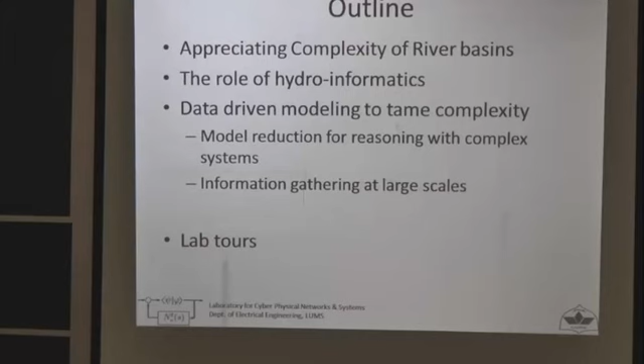Okay, now let me quickly give you an overview of my group. This is not WIT—this group existed before the Water Informatics and Technology Center came into being. I call it the Laboratory for Cyber-Physical Networks and Systems, a strange name for a water crowd. I joined LUMS in 2008, and since then we've been working a lot in agricultural automation and robotics. I'm essentially a roboticist by training, a control engineer, and in the last 7-8 years we've been looking at a lot of water systems and hydroinformatics related issues.

I just wanted to mention a few collaborations, not to boast about what we have accomplished so far, but really to give you a feel for what sort of research we are engaged in.

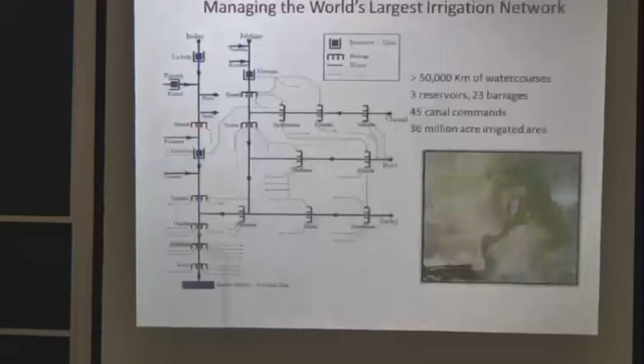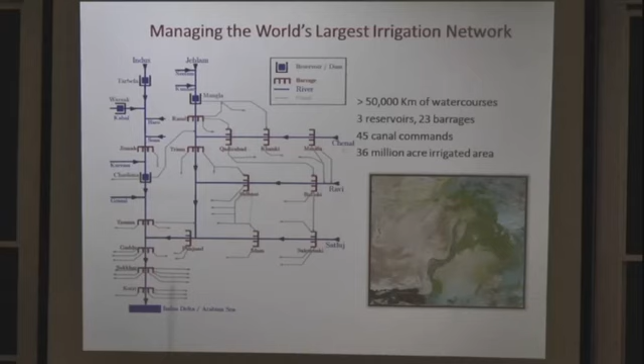Now again, let's appreciate this complexity from the point of view of scale. What we're trying to say is that the complexity of this basin comes as a problem of scale. The technical and institutional challenges are really problems of what sort of scales we're talking about. First, these are spatial scales - it's a very, very large net basin. We were talking about climate stations or rain stations in the morning, and the inability to place these stations at so many places. I just showed you the world's largest contiguous irrigation network, and you want to monitor that - measure flows in thousands of channels or outlets. So it's really the spatial scale, the inability to monitor and maintain geographically extended infrastructure. If you go by the traditional way of doing it, this is where it hurts us.

Then there's this problem of time scales. We want to collect information, we want to know what's going on in this system. The system is very complex, but it's really a multi-scale system. There's a lot going on, and you want to collect information and react within short time spans as well. But the complexity of the system isn't allowing you to do that, and I'll give you a few examples of that.

Also keep in mind there's the inability to scale the expertise - the human scalability. The basin is our country, 200 million people. You're looking at all sorts of problems, and if you have one federal body or one expert looking at one particular problem, how do you scale that expertise to all the variations of that problem? So the inability to scale spatially, temporally, as well as the human scale poses a big problem. You want to look at the entire basin, and then what do you do?

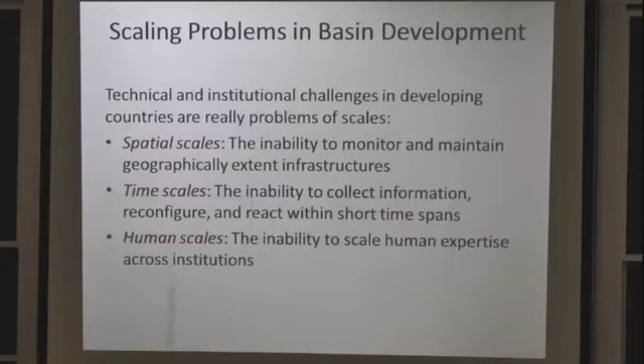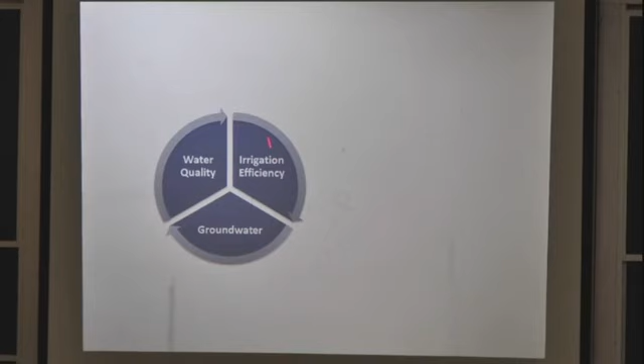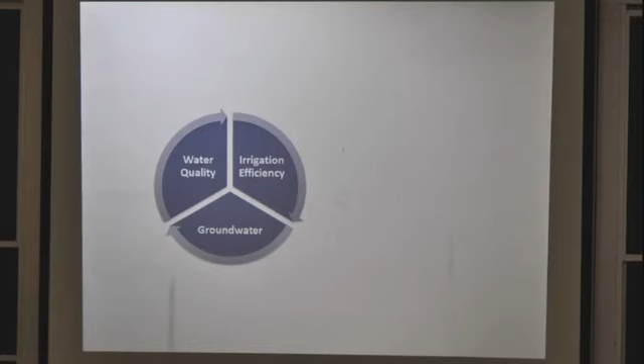I think this is where this whole idea of informatics comes in. Let me give a picture to make the case for where hydroinformatics tools help you. We start with our list of favorite problems, whatever they are - these may not be the biggest problems in your mind related to water, but that's beside the point. Take any problem, and what we've been looking at in the past day or two is how do we actually formulate these problems?

So good science, coming from hydrology, from these data sets, looking at the geophysics, the geochemistry, and really to formulate the problem first. We have not talked about legal frameworks yet. The legal and economic frameworks actually fall into the same sort of category. So first of all, we understand the problem.

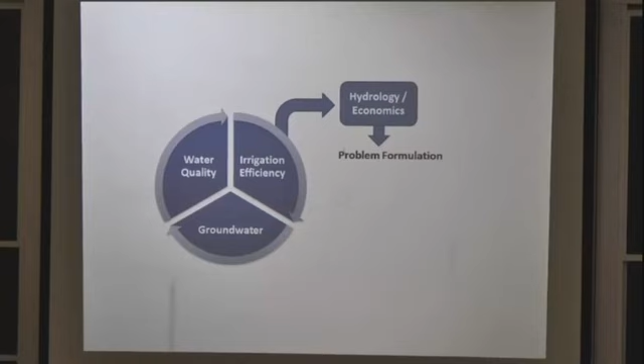In addition to that, what hydroinformatics provides you is a lot of gadgets, or you can say a lot of methodologies to look at those problems and really generate data. Problem formulation means that the step upstairs is sort of a rational process in which you are just imagining what is possible and how things should be. And then this is where you are looking at how things are on the ground.

And then the third step, which Dr. Afreen actually started to do in the morning, is where you actually bring both of them together in some sort of an integrated system analysis. So if you want to do some sort of system analysis or situation analysis of law, as you just saw there, what do you need? Well, first of all, you need to formulate the problem right. It has to be driven by good science, by good economics, and so on and so forth.

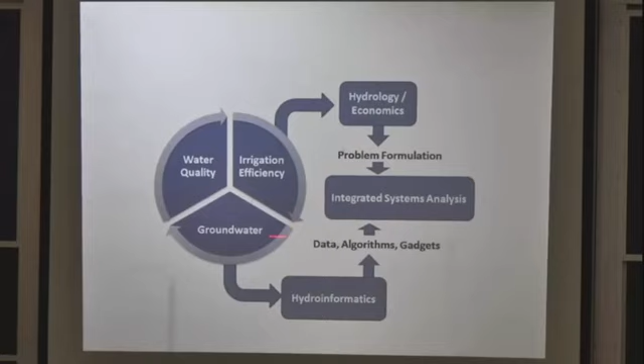And then maybe to facilitate that process, you also need good data. And that critical step can be helped by these hydroinformatics tools. And then once you do this integrated system analysis, then of course you can talk about the sort of technology interventions, and the sort of other steps or policy advice that need to be taken. So this is the general picture.

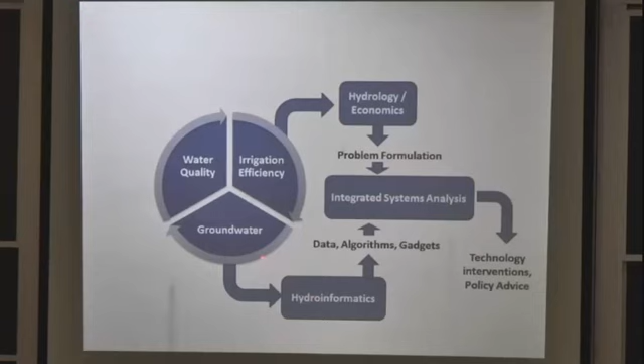In some ways, it captures the essence of the school as well. These are the different aspects of the school that map to these components. This is not, by the way, very controversial, and I think most of us agree on this. But here I'm picking this step as a very special step, because our basin is very, very different from other basins because of the scales of analysis. Now, if I bring in these hydroinformatic tools...

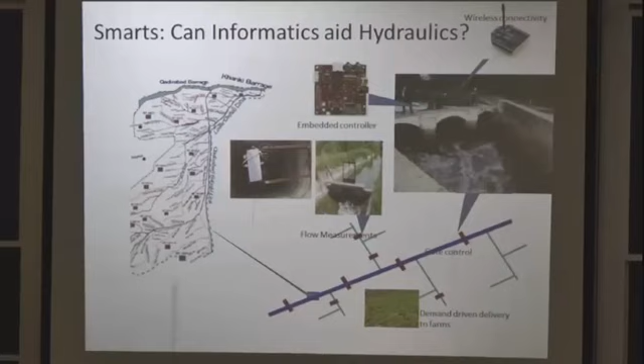What I say is that we are basically attaching smarts to the hydraulics in one sense. So you had this classical picture in which you were laying out these infrastructures - canals, wells, pumps, and so on and so forth. And now what we are doing is we are bringing in a lot of electronics, a lot of measurements, a lot of interventions. And then the question you can ask is, well, if these informatics are there, can they now aid the hydraulics? This is what I'll try to make a case about - that yes, a lot can be done by marrying the two.

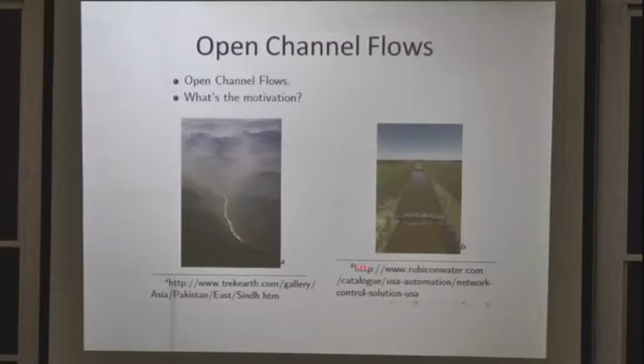Okay, so first of all, this idea of taming complexity with simple models. Now, let me come first to open channel flow as one example. This is traditional classical civil engineering, where you want to just see, or model, how water flows in channels - open channels, like rivers, like canals, like streams.

And the traditional way of going about it is - and you can also think about some man-made infrastructures put into that stream, so you can, for example, think about gates, which are controlling the inflow and the outflow from those streams. And we call them pools or reaches, just to get our terminology right.

And I put on some variables in there because later we'll be playing with those variables. So let me just spell them out. For each of these reaches or pools, there is an in-gate and then there is an out-gate - so there is an upstream gate and a downstream gate. This, by the way, would actually be inclined - it's not going to be flat, because that is how water flows. But these steps are meant to show that this is actually inclined. And then the height of the gate - now the gates can be of different structures, but just as a cartoon, the height of the gate actually controls the opening, or the head.

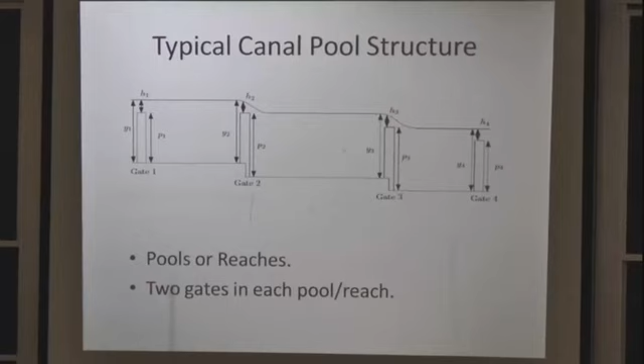And the head is given the symbol H. And depending on what this head is, then water will flow in. And depending on what head here is, water will flow out. And now you want to find out, well, what's going on within this pool, because this is a very classical 101, I would say, in traditional civil engineering. And where they start mainly is they would come up with these very complicated distributed models, these Navier-Stokes equations, essentially done in 1D, and then they call them the Saint-Venant equations.

This is the basic structure: you go along the length of the canal or pool, chop it up into little pieces, and each piece is modeled as a little element in which you model the flow and the area as basic variables. So Q depends on where you are, X, and time, T. And depending on the water level, there will be an area of cross section, so the area is also a function of X and T.

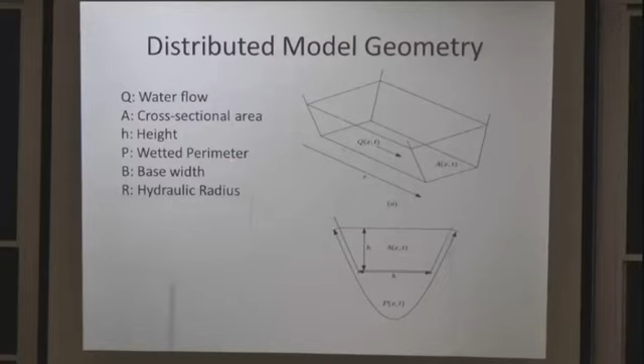I will not go into a lot of physics and maths, but just lay the grounds for what's coming next. There are other things associated that I won't bother with, but this is usually how you start.

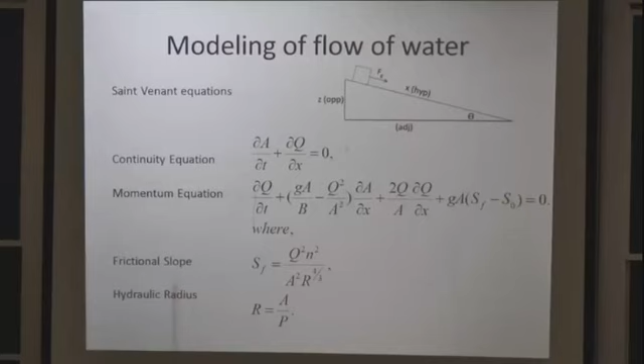You basically pass these little cubes together, and this becomes a big partial differential equation, meaning it's a distributed model. You can go along the length of the canal or river to find out exactly where the flow is and what the area of cross section is. If you solve this system of partial differential equations — I won't try to explain what they are, just portray that these are very complex models — this is a distributed, nonlinear model, so it cannot be solved analytically. If you want to know everything about what's going on in the canal, you actually need to solve this equation.

I won't go into a lot of interpretation of this, but just to let you appreciate that if you want to know what's going on in a particular channel, this is what you need to do — essentially solve or somehow find the flow at every distance and every time, and that's quite a big task for somebody to do.

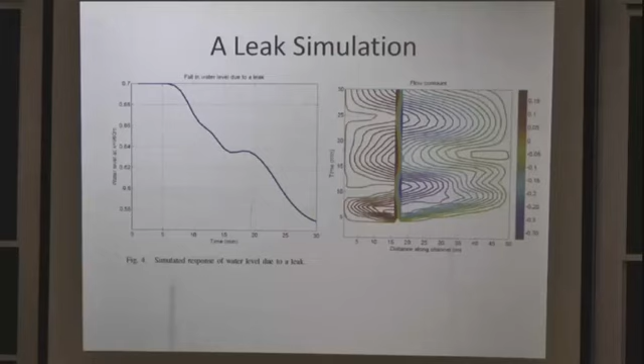Now, like I said in the beginning, if you have hundreds or thousands of channels to look at, you'd be solving this for all of those channels and then trying to reason with them together — this pool does this, it's adjacent to another pool, and so on, together making a canal, and dozens of canals making up a particular canal command. Now you want to reason with the whole system. That's not the way to go, because just the numerical thinking overloads you.

Now what we are proposing is that you can actually start with very simple models. I think in the morning Dr. Asif mentioned these lumped models. These are not going to be very accurate models, we understand, but what they allow us to do is reason with these systems — to capture the complexity at a high level, somewhat, not exactly, but enough to let us think about these networks.

And then these civil engineers tell us, well, there is an empirical relationship. We saw this in the morning too, that there are empirical models that capture certain relationships. So the empirical model that captures the relationship between the height of the gate and the flow at this interface is given by this formula.

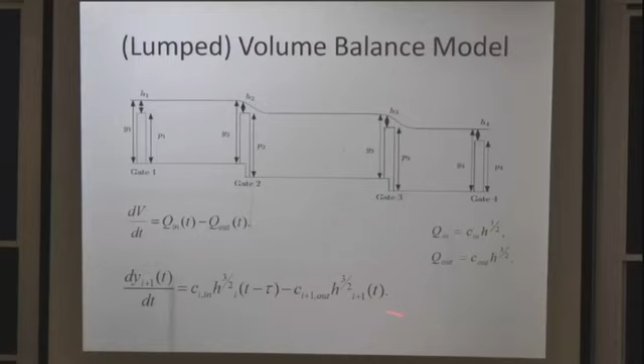And I will come back to this, in fact that is going to be our next task. For the Saint Venant equation, you knew how to do that because if you get the cross section for the canal, meaning the canal geometry, you can begin to do numerical simulation. But then how do you get these things? That is the critical next step. Well, again, these hydroinformatics type technologies are going to help us.

So what we are going to do is start with these physical models. And again, I thank Dr. Asif for introducing this terminology in the morning, that you have these physical sort of models. And now we are going to do these data-driven models.

Because I have to correct that, this is not a physical model, a physics-based model. A physical model is something physical, you are looking at something like that. But this is a mathematical model, a physics-based model.

Okay, so I think I stand corrected by the civil engineering crowd. You are talking about those scale models in Nandipur, huh? Yeah, okay, I stand corrected. So physics-based model—we electrical engineers call this a physical model.

So I think for us this is fine. But thank you for correcting that. In future I will use a physics-based model. Very picky. Absolutely.

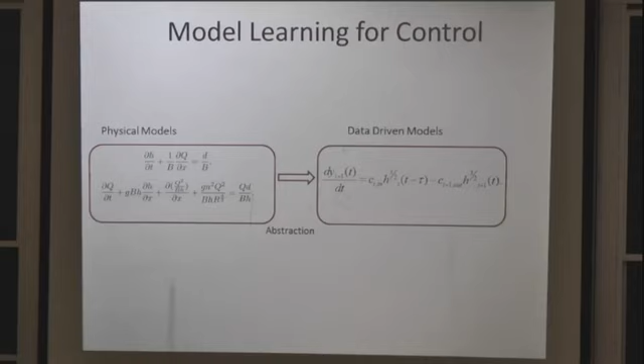So from a physics-based model, we are now going into a data-driven model. This is really the abstraction. But is it even possible? Can you really do that? This is where we did a little bit of work.

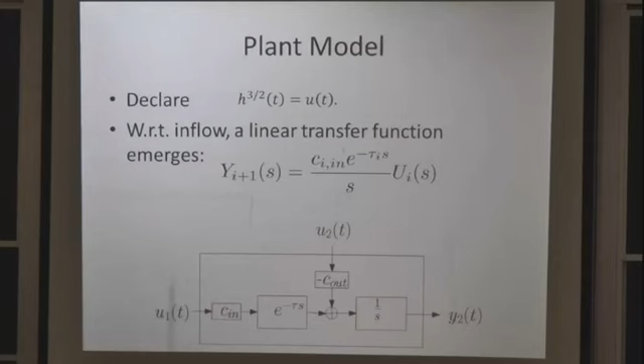And really what you are looking at is that there is a gate at the upstream and then the gate at the downstream, and this is your plant. So it's a very, very easily understandable model for the electrical engineers. Sorry about that. All right.

Now, how do you actually make use of these models? What are these good for? Even though it's a physics-based model, does it even make sense or not? What we do is give the system these same sort of inputs and find out what it is doing, and then give it to the model to find out what parameters will explain the working of the model that way. So it's a very empirical fitting.

So here what we are doing is in simulation, at one end we are changing the gates vigorously, closing and opening up and down. And on the downstream side also we are closing and opening the gates. And then we see what the water levels are like.

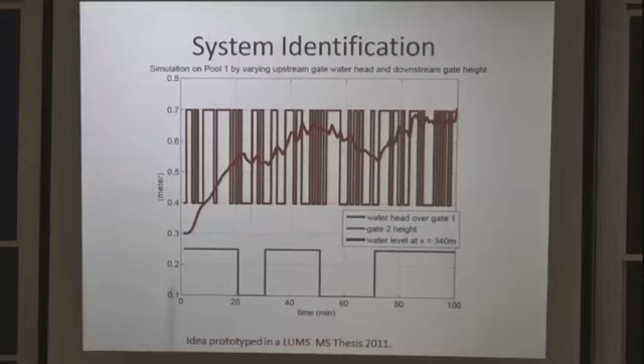I mean, just looking at them, they look similar. At least they look similar. I have to say that red fitting and blue line - red is predicted by the model, which is the mass balance equation, not a Saint Venant equation. The blue one is the Saint Venant equation. You are solving this equation. This is not a Saint Venant equation.

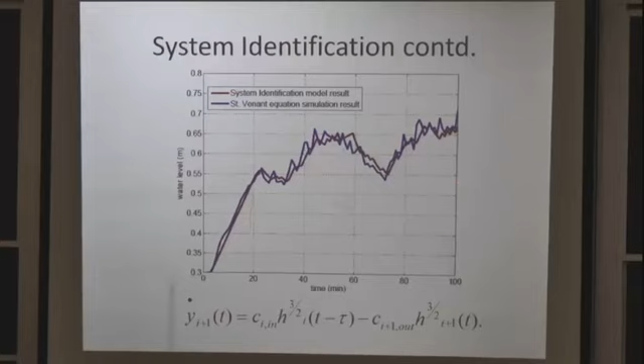What I'm saying is, wait - what I'm saying is that I have solved the Saint Venant equation. And then after solving the Saint Venant equation, I have taken just one cut at a particular distance, and that is the blue line. Now I take this model, and it is composed of these three parameters, and I search for the three values of C in, C out, and tau that somehow align with this, and that is actually the red one. And by the way, this is all in simulation so far, and then you can find out what the parameters are. We actually did this in actual conditions, just to see whether this works or not.

So these were some of the experiments that we did at - this is a channel known as Khaira Distributary. I don't know how many of you know about this. It's just right next to, so it emerges from Jallo, where the Lahore Canal emerges, and then it comes all the way here to Lahore. This is an old distributary which is no longer used for irrigation purposes. So we had permission from the irrigation department. This is really our test bed for the last few years where we have been doing these things.

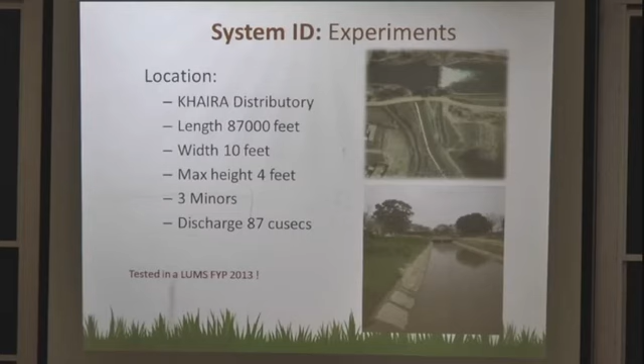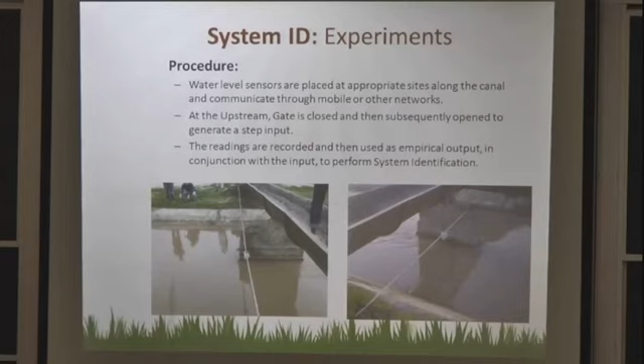What we did was that the procedure was that we actually placed these water level sensors at the point where we wanted to verify this sort of model. And then we just opened and closed the gates to find out whether our models were fitting or not. And let me actually play a little video.

I will skip the map.

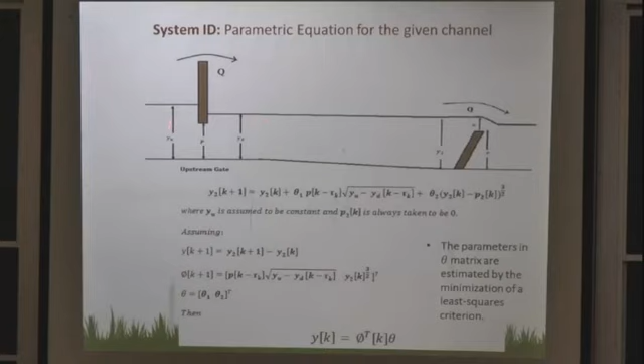This is just a little bit of detail about what you needed to do. This is a discretization of the model and playing with the gate structure.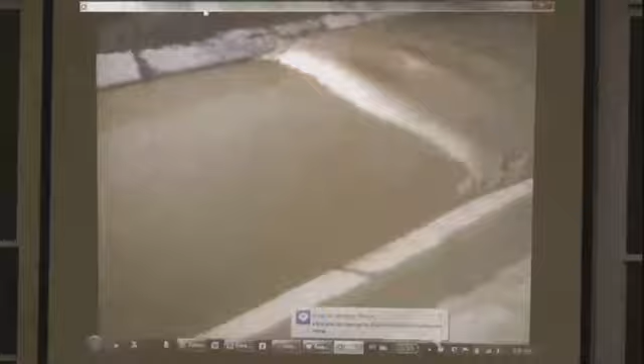Now I'll play a little video, maybe it won't excite the civil engineers, but at least it will excite the non-engineers. This is a release, and I think the irrigation people allowed us to do that. All of a sudden you pull the gate, and then water is gushing through. This is the travel I was talking about. This is an actual experiment, just to let you know we did an actual experiment. I think the irrigation people don't normally allow these sorts of things in normal canals.

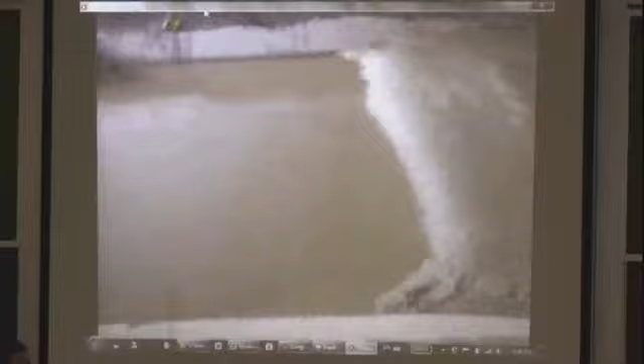So this is what we call a step test. You all of a sudden open the gate, and then you do the step test. It's a very electrical-engineering-like thing.

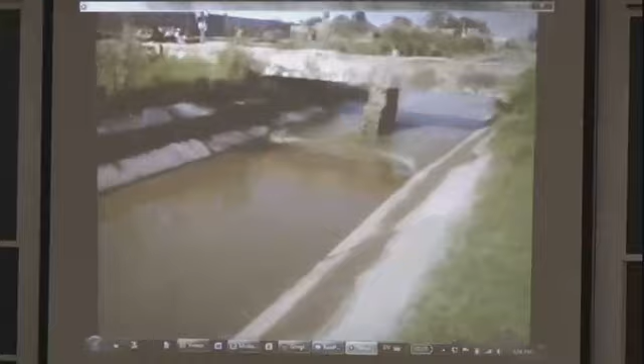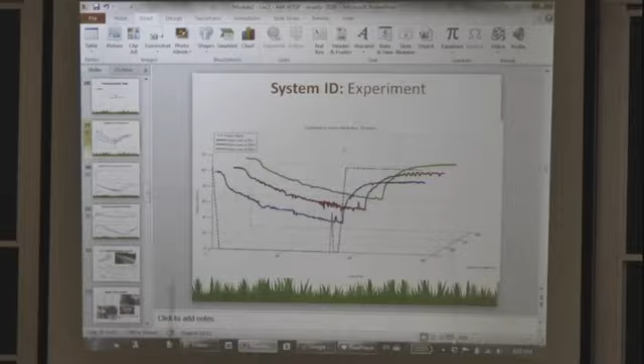So these are the responses. You give the step, and these are the different recordings of water levels at different places. Then you go back to your algorithms, or your search method, whatever you want to call it, in order to find out what the model is, and what those three parameters are that best explain it.

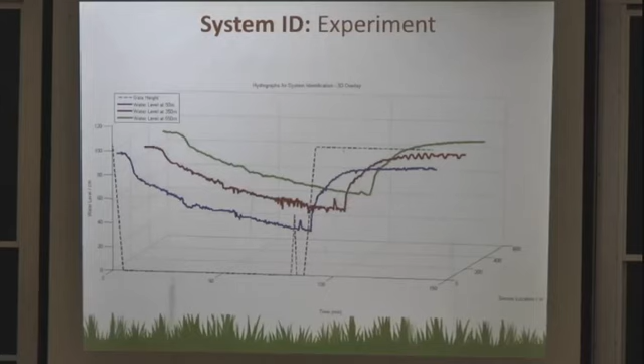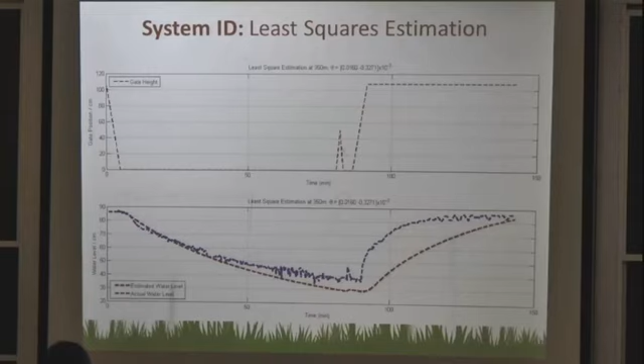By the way, this was work done by some of our students in a final year project, actually multiple final year projects. Then you overlay with the model to find out whether the model was making sense or not. For example, this is the actual recorded data, and this is what the model is saying, and of course they don't agree that much.

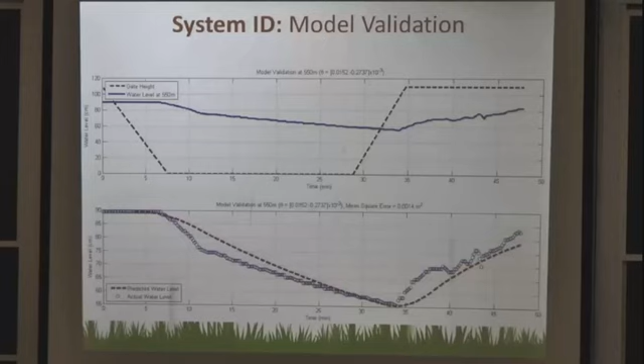But really, the power we now have is that this very simple simulation—and those who do modeling will appreciate that this simple model is much, much simpler than that partial differential equation—if you now want to play with dozens or hundreds of channels to see what is going on, I think now you can begin to reason with them.

We also went further and played with this idea of downstream control. Now, downstream control in our system doesn't make a lot of sense because we don't have storage in the system. So I don't know how many of you know about the difference between supply-driven and demand-driven irrigation supplies.

Let me make an analogy.

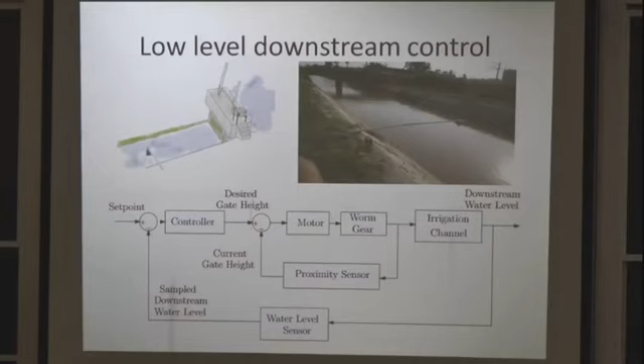So that's a very fancy idea, but nevertheless we can play with that. We sort of played with this whole thing, and we actually implemented it on a distributary, where this is the irrigation channel that we've begun to play with. We have simplified models, and using control theoretic techniques, we came up with controllers and some gate automation, which you will probably see in the lab, and also water level sensors. So now we have the ability to measure water level and the ability to move the gates up and down, and via that you convert your channel into this tap-like thing, where whenever you want to open it, you can open it.

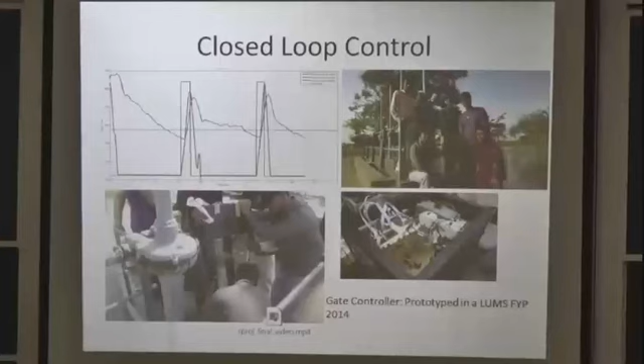So these are just some pictures from that student group that built that thing. I have a short video, but I think I'll skip that in the interest of time because I have more things to show you.

Okay, these are again more advanced implementations of this idea. This is not Pakistan, where people have actually implemented this. This is an Australian example where these are the sort of controlled gates. You can see there are these solar panels there, meaning there are a lot of smarts built into these gate controllers, with the ability to receive commands and measurements and then open and close the gate, with some intelligence sitting here to make those decisions. This one is relatively more primitive, but nevertheless, this is also in operation. So there are examples in Australia, in Europe, in USA, and in China.

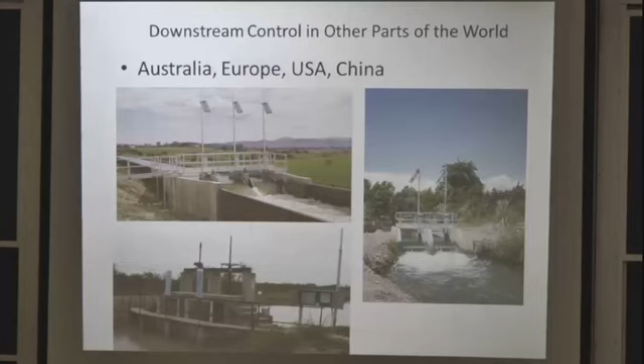All right. So how does this basically work? Let me just show you. I mean, this is cute to look at.

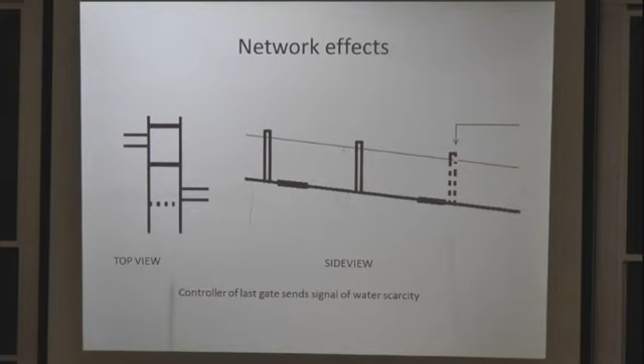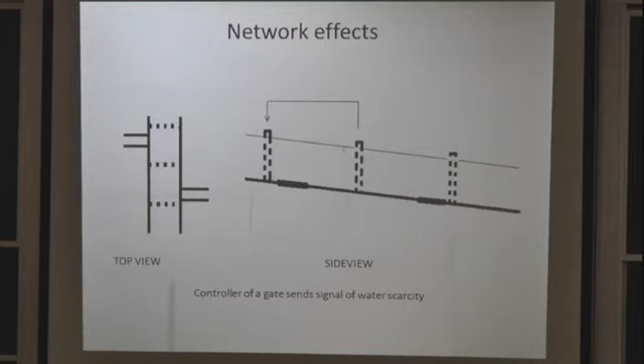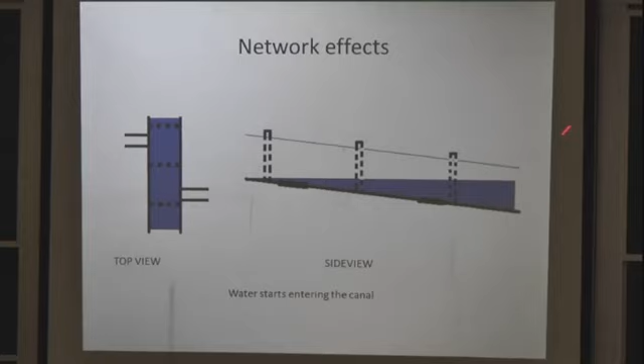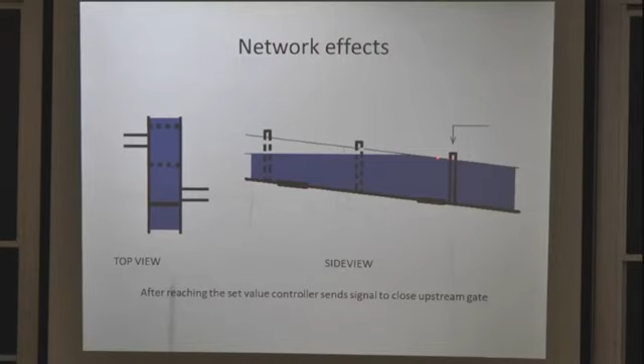So for example, this demand-based supply system. Just assume that initially this is your channel and these are your reaches, and your entire channel is empty. So if you want to fill this up with a certain amount of water, there is demand here, so this is where the gate gets activated, and you try to fill it up. Now, because there is no water back here, it will issue the command one step back, and open this gate as well. Now this is also empty, so it generates another command back here, and this gate will be open until you get water. Assume this is where you start to fill up. Now when you get this, all of the gates are open, and you start to fill in. Now it's filling up and up and up. And now here the water level has been met, and the gate command has been given to shut this gate down. But this is still filling up and up and up. Okay, so this is a very simple idea of how you actually start with these.

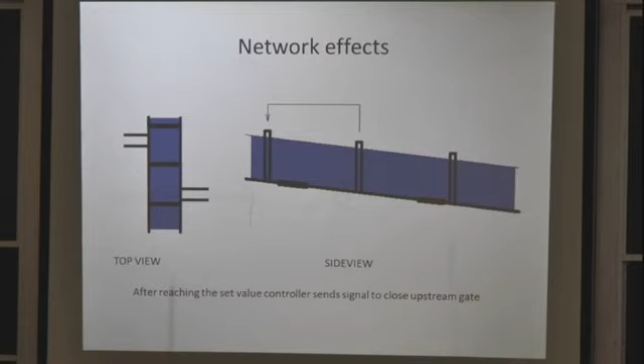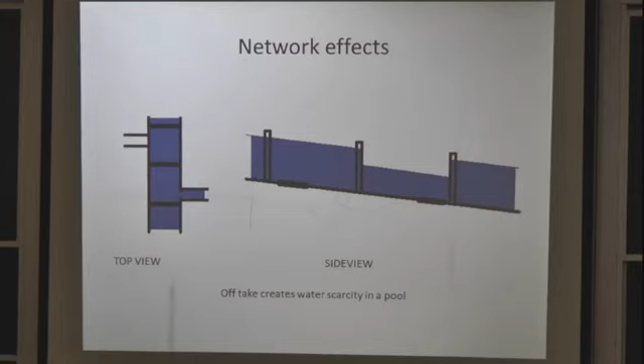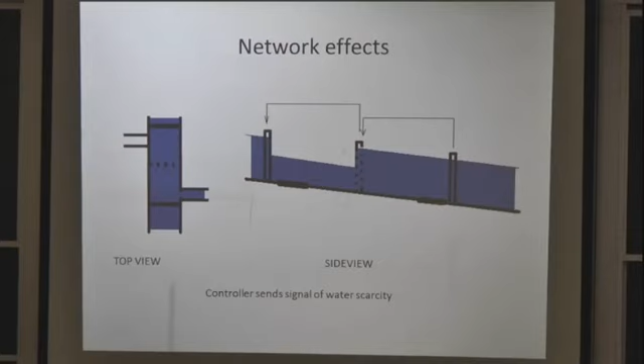Now what happens is that, for example, in the very last pool, a farmer starts to take up water. What will that do? That will lower the amount of water in the last pool. So let's simulate that, it's basically simulating it here. This particular pool had an off-take here, and they consumed water. Because you needed to maintain balance here, what happened? It issues a command to open up this gate, and from here water will come up here. But if water comes up here, then there is shortage here. So this shortage actually just travels back and back and back until you can go back to your original situation. So this is the idea of demand-driven delivery. Instead of just flooding the channel blindly, you are generating demand and then acting to mitigate your losses.

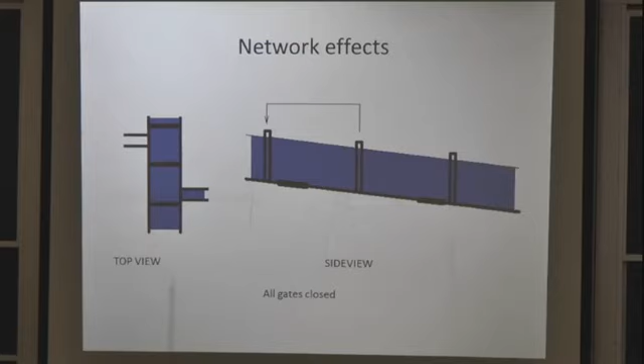So you can play with all sorts of things because now you have the capability to do that through this sort of automation. You have the capability to measure and the capability to intervene as well. It's a smart water grid. But really, technologically that is possible, then you also want to verify, well, does it even work? Now you have all of these tools linked together, so how is the performance? And I think this is where these models that I just mentioned to you come in.

Now what you can do is play with these series of boxes, each depicting the models we just discussed. These models interact with each other to generate a certain demand and fulfill that demand. You can play with that. People have actually done that. So you can play with architectures.

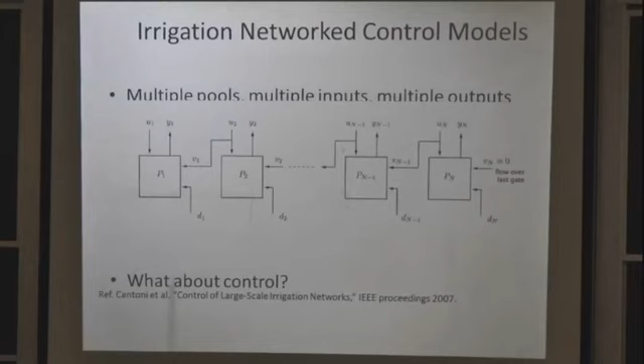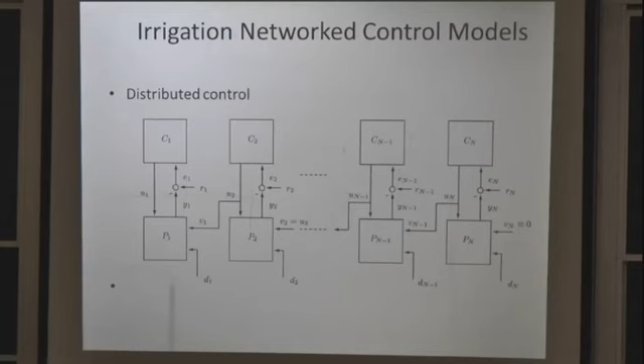This is just a bare system. What you can think about is, what if each subsystem has its own controller? That is one way of controlling it. Or you can transmit all the information to a center, or have some mixed architecture in which the gates are talking to each other or to their neighbors, and so on and so forth.

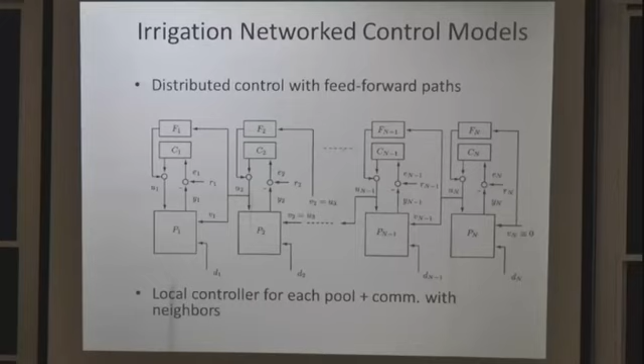The reason I'm showing you this is that you can now think about all of this. It's a complex system, of course. If you wanted to do this with the original physics-based models, it was not possible. But with these simplified models, you can play with that complexity and think about architectures, control performance, and so on.

Okay, so this is that decentralized control, right, for one channel. So it's possible for one channel, but for 20 channels—for example, we did a certain automation in the Akra Canal branch in Bhavnagar, and it was an 18 canal distributary system.

18 is a significant number. If you want to solve 18 solvers at once and do measurements every 10 minutes or 1 minute, it becomes a very complicated thing. So this is again about managing complexity.

Yeah, but you can do that for supply-based systems. It's very difficult, but this is the beginning of the idea.

What people have done is mix the two—supply-driven and demand-driven. So you can optimize schedules midway and reissue them.

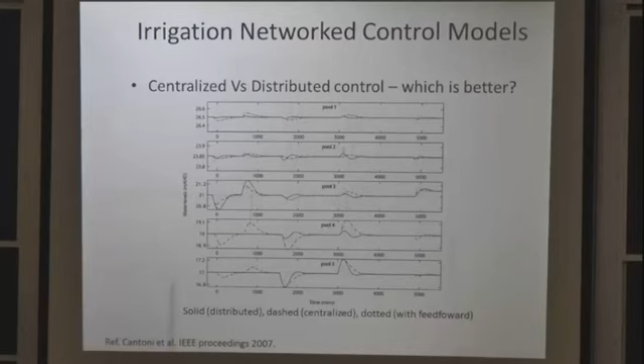Okay, now just as a final example of what you can do with these systems, you can also think about how people behave with these systems, and behave with them in an analytical way.

For example, suppose you have this box representing the canal model we just discussed. It can be that very complicated thing or that simplified thing. And now you have this controller, which is talking to communication networks where commands go in and come out.

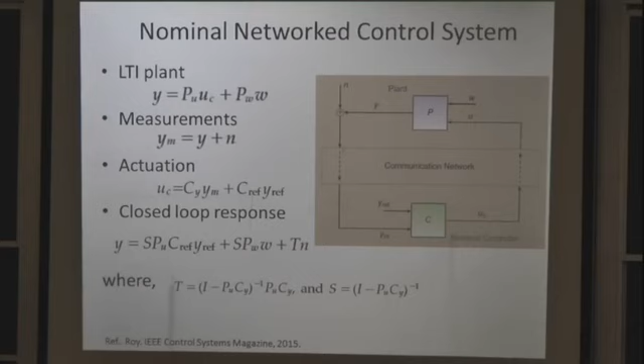This was not possible in the previous, very hydraulics-intensive framework. I will not go into details, but it tells you there are ways to go about it. There's a particular simulation in which, for example, you have these reaches—this is that system, and if you do things in a certain way, it is able to...

I can show you how to steal water from this system without the gauges being able to know what has gone wrong. I'm explaining how water theft has taken place in this system using analytical methods. These are all ideas coming from systems theory, from analytical tools, and this is possible because you have simplified models, not these very complex models.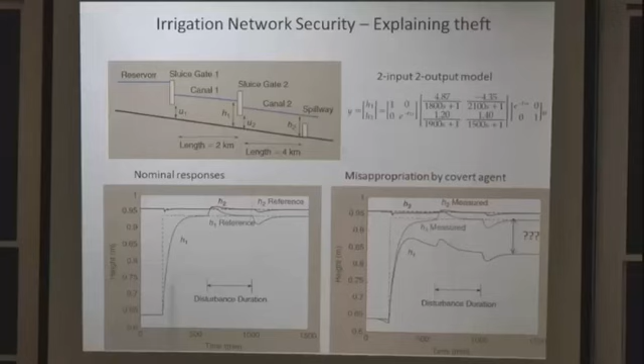Now, what we are talking about here is a very complex system, what I call a network smart water grid.

So there are a few terms to throw out here. Those of you who are interested, there's this whole idea of Internet of Things or cyber-physical systems, and this falls into this. The physical elements are the rivers, water courses, barrages, weirs, and the cyber elements are sensors, controllers, communication, and so on.

Let me outline once again. The take home is that if you equip your system with electronic gadgets and modeling techniques, you can think about what's possible. First, you can increase efficiency because now you're monitoring systems. You can talk about demand-based delivery, which we just played with, or a mix of demand and supply-based systems. You can also talk about control of non-technical losses - thefts, a fancy name for thefts. I showed you how to analytically analyze water thefts.

Unauthorized dumping - somebody dumping something into your channel - you can analyze it too. A general system has monitoring, flood breach security, enforcement of water rights. I think this is very important. Your legal frameworks specify how much water you should get, but somebody has to make sure you actually get it. This takes care of the first part - I initially talked about river basin complexity, and said that with such a complex system, physics-based models directly may not even let you begin to understand it, so you need to come down and talk about simpler models.

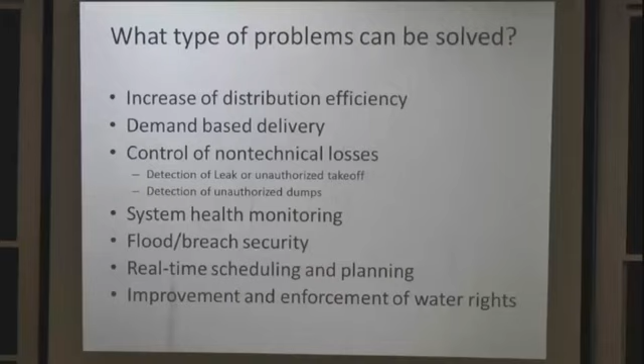Now what we're going to do next is think about information gathering - it's a very complex system, and within it, how do we collect information about things? I'm going to give you a glimpse of the technologies available for gathering information. This will be our lab tour, where we'll view three technologies.

One is measuring flows in irrigation canals. The second technology is measuring flows in small outlets - what we call moghas, our small drains - how you can measure flow within those. The third is measurement of siltation and sedimentation in canals using aerial drones. We'll show you some fancy robots in the meanwhile.

To give you an overall picture, this is our first demonstration. This was a project we did in 2012-2014, in which we instrumented a full distributory irrigation canal system in Bahawalnagar, where we installed ultrasonic sensors to measure flow in a particular irrigation canal. This is a telemetry system.

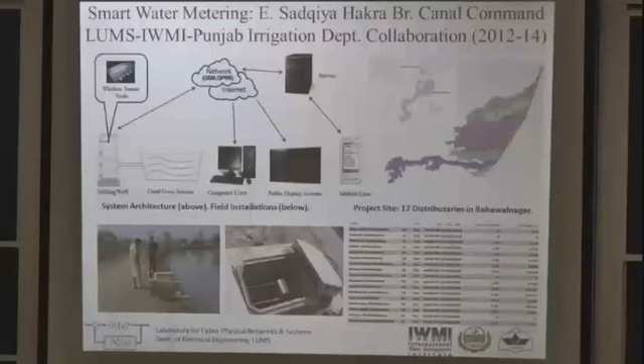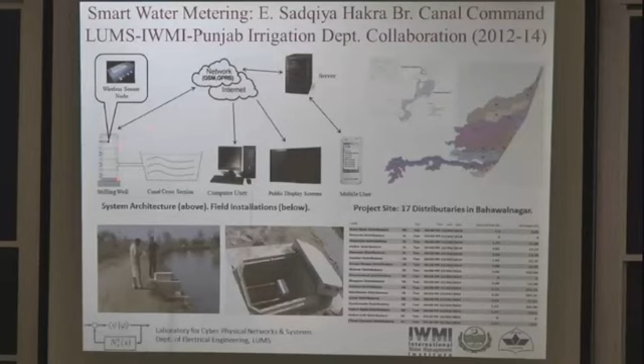So this is a stilling well that we built. We'll show you a mock-up of this built on the campus outside. The measurements are made by this wireless sensor node. It takes these measurements and sends them to a server where this information is displayed to the public. It's a very simple idea.

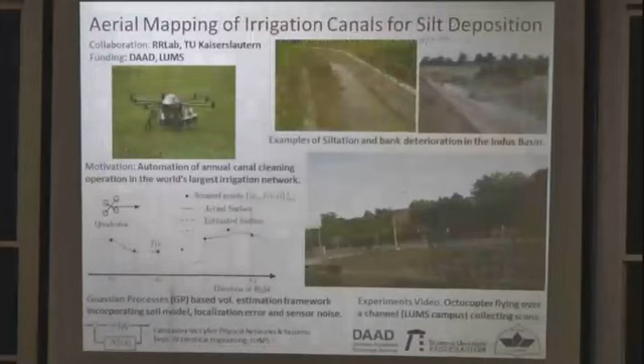The second technology I'm going to show you are these aerial drones. What is this all about? Well, you've heard the word silted. Every year the canals need to be surveyed to find out where sedimentation has occurred, so that cleaning of the canal can be done. And all of you must know that this only happens for 2 to 3 weeks in a year, when there's a canal closure and they try to do this work. The idea here is basically to automate that process.

We're not going to fully automate the cleaning itself, because that's too much automation even for us to think about. But what we're going to do is see how we can automate just the surveying process. We need to first find out the sedimentation, and the idea is that you can use these newly available drones. We've modified some drones to carry these instruments - laser scanners and cameras - which can go along the length of the canal. The idea is to make them go along the length of the canal autonomously, because these are long stretches.

And during that, they will try to measure channel degradation, taking channel cross sections and trying to measure how things have changed from the last year.

I will just play a little video, since we don't have the drone flying right now, just to show you that we have something working. This is the channel on campus that the drone is flying over. It's carrying its instruments, going along the length of the channel, while carrying sensors that take its cross section.

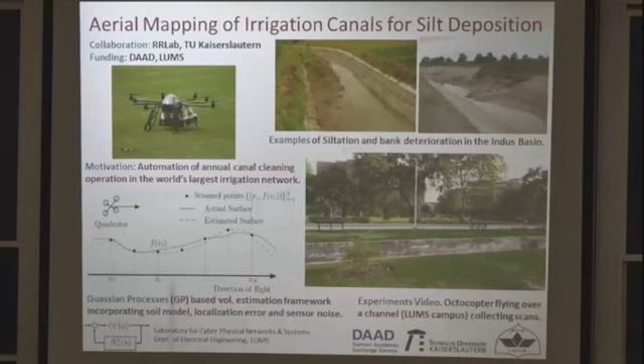I think when you visit the lab, you will see more elaborate measurements and what it is getting. So these are just some technical details of what is going on. We will go into the lab and see what's happening.

Now, why was I showing all three of these things? Remember my initial slide when I said there is this problem of scales - the inability to monitor infrastructure that is very large geographically, the ability to take measurements at very short intervals, and the ability to scale human expertise. Let me reiterate what we've done in these 2 or 3 examples.

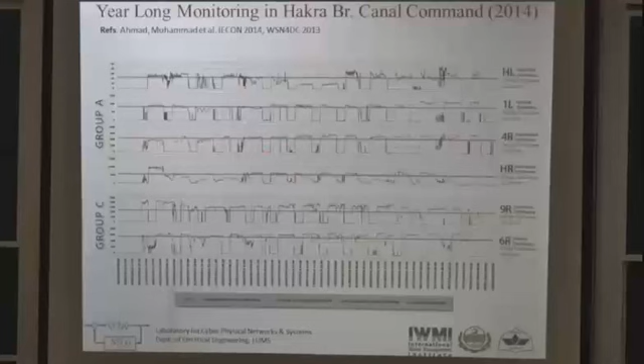The labeling we've used here, these reds, blues and greens, depicts that whenever there is a red, it means the canal was supposed to be shut down. We did not find many of those cases, so actually they were very clever people. At least the people in Bahawalnagar are maintaining their schedules very well - I mean, you can actually detect that, whether the schedule is being kept or not.

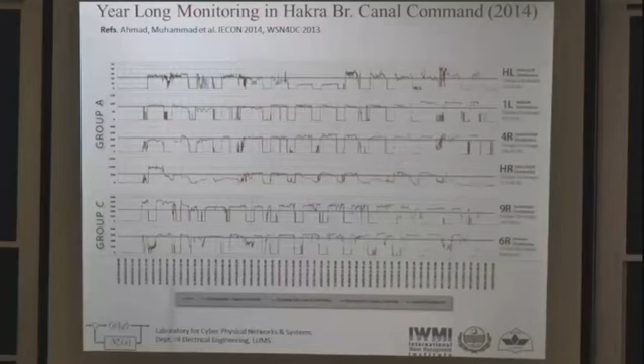What else? If these are flows, and you do area under the curve, what do you get? The volume. And then you divide it by the canal command area, now you can actually play with equity - is everyone getting their share of water or not? So that's the systems analysis - this is where the systems analysis now starts to kick in.

Once you start to gather this data, it helps you scale that expertise, in the sense that decision making that previously only a high-level official in the irrigation department could have done, now I think a simple farmer can also do, if you provide him or her with a little gadget or app to find out if they're getting their share of water. This is really the scaling of expertise.

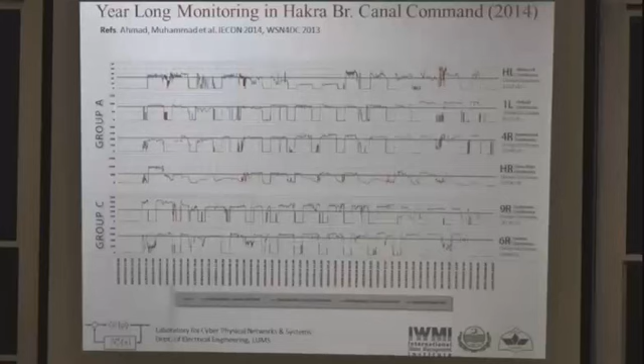So what I've just demonstrated in all of these examples - let me come back to these take-home messages. I understand this is an unusual talk for a water workshop, but if you just remember this, it's fine. I've again tried to make the case that these river basins are extremely complex systems, and they require this sort of integrated systems analysis approach, which is not possible without data, as you've seen again and again during this course.

Data-driven modeling is really the key to such studies, which requires smart infrastructure - when we say smart, we need to make some gadgets or devices. And these complexities can be tackled using two ways: one is actually making electronic instruments, gadgets and robots, and also thinking abstractly - graduating, or in fact descending, from these very exact physics-based models to these more informal but really data-driven models. They let you think about these systems in a more systematic way.

Okay, so this is where I will stop with this presentation. If there are any questions I can take, and then we can go for the lab tour. So people can play with that, yeah? Sure.

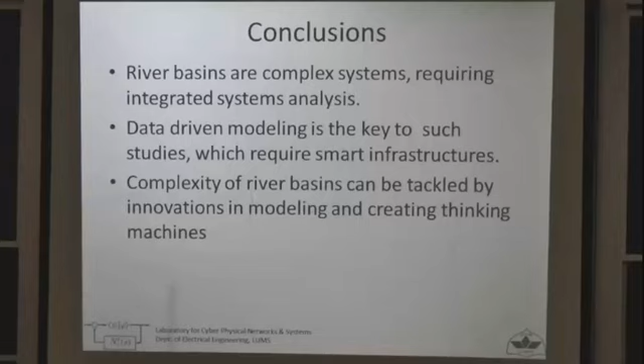So not only are these not accurate - we are fully aware of that - but we just talked about sedimentation. As the channel gets silted, things will change during the time of the year as well. So given that all of these things are there, would you now prefer to play with that model, or again use those same Bernoulli equations, which are prone to even more of those problems? The channel geometry, if it's changing, then the impact of that change is even bigger.

So that again can be incorporated, but then you are actually just chopping it down into smaller parts. That is just a second order sort of correction.